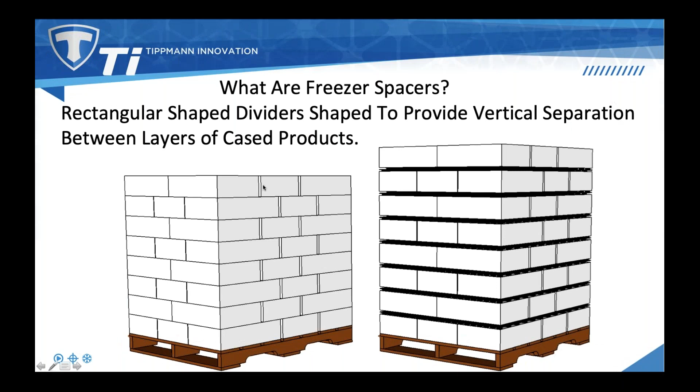So what are the alternatives to freezer spacers? Well, many products have holes in the boxes. I think of hams and turkeys, where if you're able to get sufficient air through the boxes, you don't necessarily need layer dividers. You can also stack the product so that you can get sufficient airflow between the cases to get good freezing results. That's often a very labor-intensive option because most of the time you have to change the ti or the number of cases per layer to provide enough space between the cases, and then you probably have to return those layers back to a full layer to be able to ship the product.

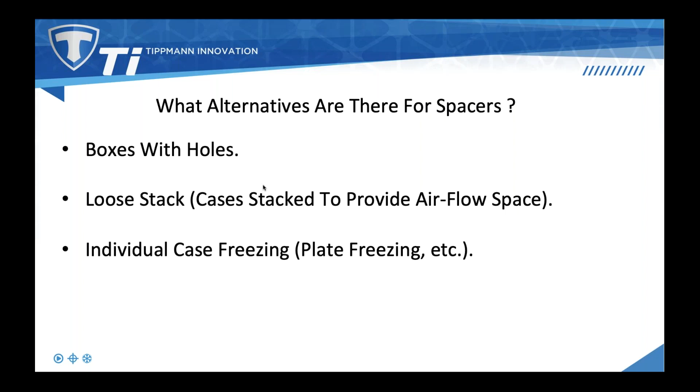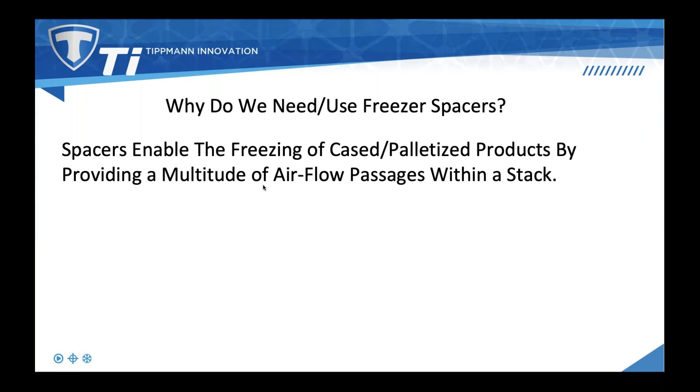And then obviously there's other technologies, either IQF of the product or individual case freezing, plate freezing, VRT, those other solutions. But we're going to be focusing exclusively on case and palletized products that require spacers. So really, why do we need or use the freezer spacers? Again, the spacers enable the freezing of the case palletized products by providing a multitude of airflow passages within the stack. Further down in the presentation, we'll discuss the importance of the number of airflow passages versus the height of the case product.

So what other functions do we need the spacer to do? Number one, the spacer has to be able to support all of the products above them. So if the cases are forming around the spacers and cutting off the air supply, that's a problem. And of course, they have to provide the vertical separation for the airflow we need. So when we look at a pallet, here's a little wireframe pallet. We really want every case in the stack to freeze at the same rate.

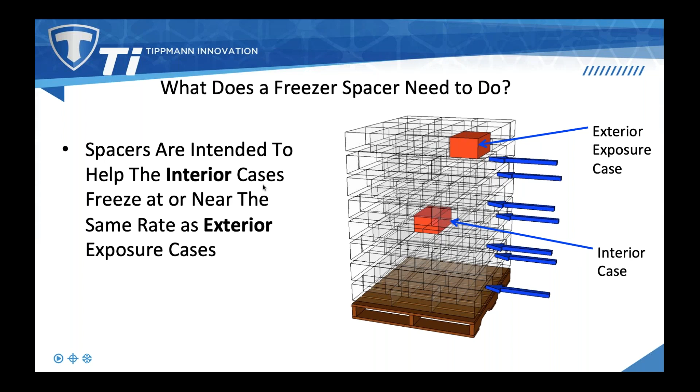So I've just picked out two cases. The first one is upper right. That exterior exposure case, most people have very little problem freezing a case in that position on the pallet. Whereas further down in the pallet, midway and lower, can be challenging if your spacer is not performing well. So again, we need to have it properly support all the cases that are stacked above it, and provide sufficient airflow space to get the heat transfer done. So now, next I'm going to talk about challenges that are faced by all spacers.

So the first thing I want to discuss are case and pallet dimensions. I call it the double whammy of the tall case, where tall cases require longer dwell times because there's further distance to center, and it just takes longer to freeze the taller case. And then the other thing that really hurts us is taller cases allow for fewer spacers. So in a few slides, I'll show you two examples. And then the next thing that we all are challenged with is the accumulated weight causing a crush challenge.

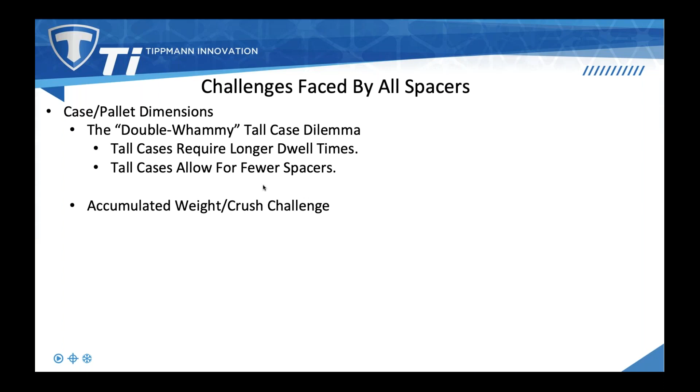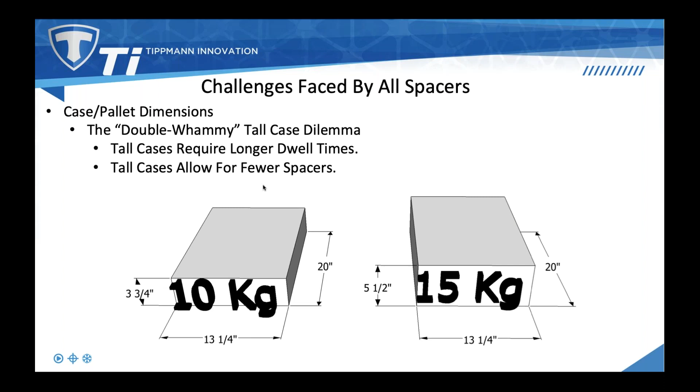So here's two cases. I have a 10 kilogram and 15 kilogram. This happens to be details from a leg quarter project. Notice the 10 kilogram case is 3 3/4 inches tall, while the 15 kilogram case is 5.5 inches tall. And this is a 7-ti box, so the base dimensions are the same, 20 inches by 13 1/4.

So when we put these cases into pallets, we end up with somewhat similar looking stacks, but when we consider what we're faced with, the shorter case on the left, the 10 kilogram case, the weight of the product is just over 2,000 pounds, but we're able to get 13 spacers into that stack. While the pallet on the right, the 15 kilogram box, the taller box only yields a 9-high arrangement, so we have 9 spacers.

So in both of these, we do have a spacer on the bottom. Some people omit those, some people include them. It really depends on testing whether it's needed or not. But now we have 9 airflow passages versus 13, and the distance to center on the taller case hurts us. So that's why I call it the double whammy of the tall case dilemma.

So we have data that shows the performance of these two in about a -15 freezing arrangement. The shorter case with more spacers, they're able to turn in 18 hours with a 0-degree core temp, while the pallet on the right, the taller cases with fewer spacers, that's 1/3 more hours to freeze. So you can tell that the tall case really does have a significant effect. So when we're doing freezing or tempering, clearly we're looking at box height as a very important consideration.

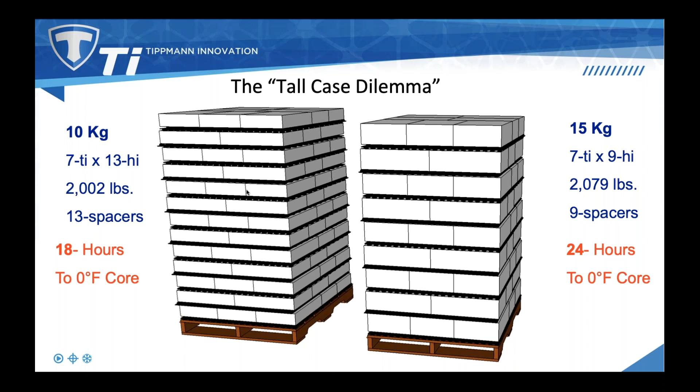The next challenge is something most everyone can go view. If you're doing a considerable amount of freezing or tempering, start watching your pallets. Make sure they're performing like you're wanting them to. And here in this example, I grabbed that 13 spacer pallet just to show that the top spacer is only bearing 154 pounds of product above it. So obviously we're not expecting crushing at that top layer. Then you pick up 154 pounds per layer moving downward. So at the very bottom, between the bottom two layers of product, that spacer is now bearing 1,848 pounds and is very prone to crushing.

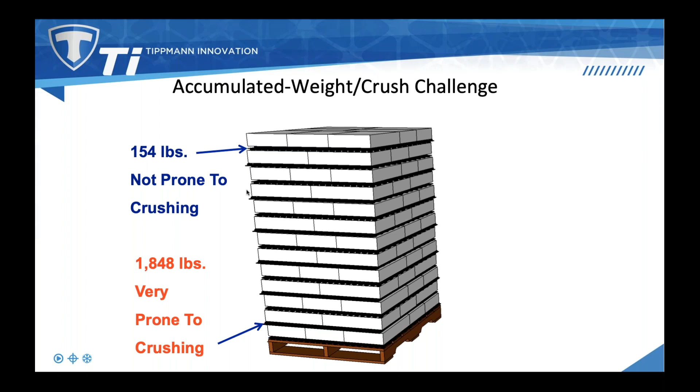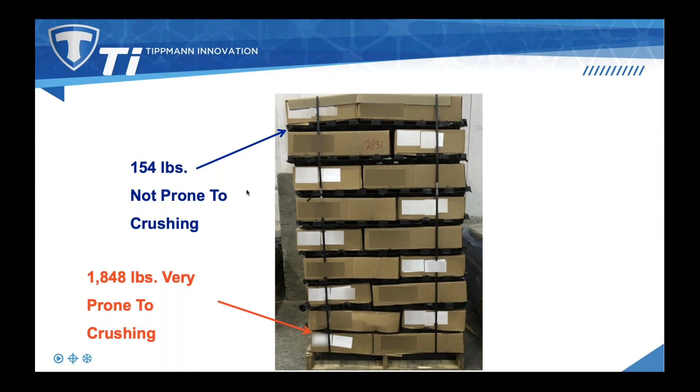So here's a photograph of product, and it shows us what we often will see. For someone that's doing product freezing or tempering, these kind of pallets really become challenging. You can see the significant space near the top of the stack. In fact, on the second layer, I can actually see through the pallet and see the panel wall. So we have great open area. That spacer's doing a great job on the top, about 6 layers. And it looks like the bottom 3 layers, there's significant crushing. And really we see more case failure causing the crushing than spacer failure. We'll discuss this further, but we're going to touch on case carrying area and why that's important for case integrity.

So here's a couple other views of that same pallet. You can see on the photograph on the left how really the bottom 3 layers, there's virtually no visible space for air to be going through that pallet. It's virtually cut off. So if you're trying to get fast and consistent results, and you're faced with this accumulated weight and failure of your corrugated box, you can expect a significant difference in performance in this single pallet. Not to mention how the rest of the pallets in your freezing system are operating. So I think it's fair to say the best way to deliver fast and consistent results is to provide excellent velocity in all layers.

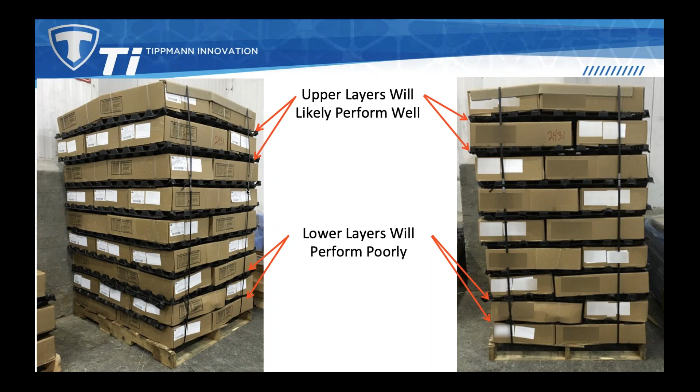I think we can all recognize some of the distinct disadvantages. Obviously, it's somewhere between difficult and impossible to sanitize. So if you have a product that's freezing or tempering product that's purging, where you're getting your spacers wet, exposing them to liquids coming from boxes, this is a challenging solution.

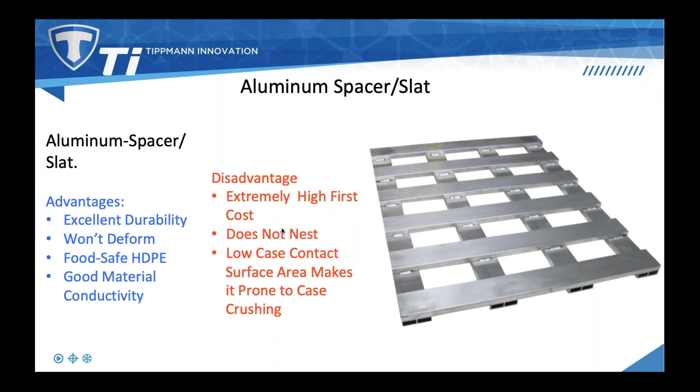On the disadvantage side, these things are very expensive. They're hundreds of dollars first cost. Next thing, obviously, they don't nest when you stack them. They're going to accumulate their actual height. The next thing is the low case contact surface area makes it prone to case crushing. So even though we're not going to crush the spacer, they are going to be prone to case crushing.

The egg crate spacer is probably the spacer most people are most familiar with, and obviously it gets its name from its similarity to an egg tray or egg case. The advantages are low first cost. These things, if you're buying in quantities, you might be buying them for $5 to $6. So they're low first cost.

They are fairly low profile, typically 1.5 inch dividing height. They nest well when you stack them. They are easy to clean, sanitize, and they are food safe, HDPE, high density polyethylene.

The disadvantages: these are notorious for crushing problems. Very poor case carrying support area, and their airflow passages are easily cut off by cases that are crushing. So I'm going to call those poor airflow passages.

The next spacer we're going to look at, I'm going to call the maxi spacer. I think that's a trade name, but there's a host of taller spacers. So this is just a family of taller spacers with a non-egg crate profile. Just the height advantage, I think these are like 2.5 inches tall.

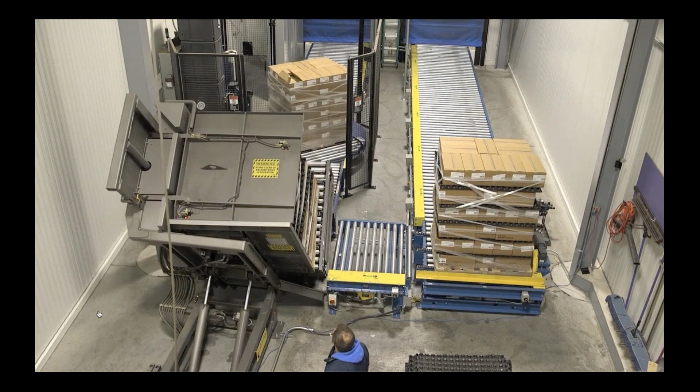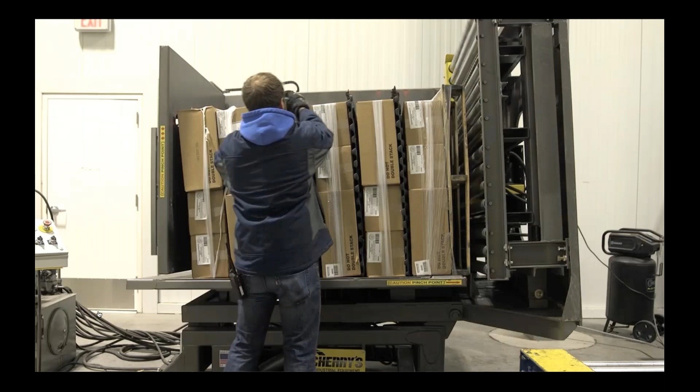So you can see the case is being conveyed onto the tilt table, and the operator is going to tilt that pallet back. You can see he has a pallet up front that's already being wrapped, and it will automatically convey out. But he'll move a couple bands of wrap out of the way to pull the spacers out. There's a stack of spacers behind him, so he'll wrestle these out, stack them on the pallet, and move on.

That really concludes my presentation. Hopefully we've drawn attention to some of the more important considerations and helped explain some of the spacer technology improvements and different ideas people are using. It really comes down to providing excellent velocity between every layer to deliver fast and consistent results to our customers.

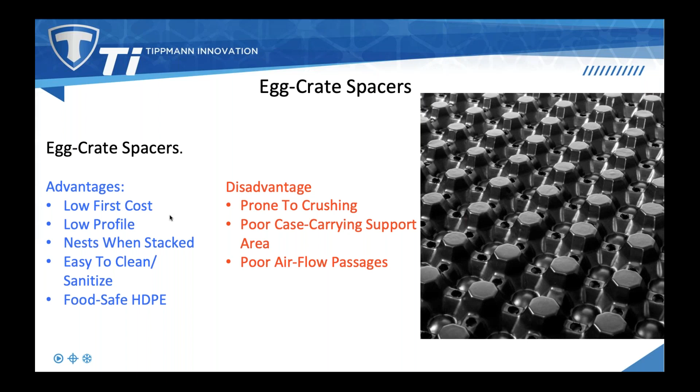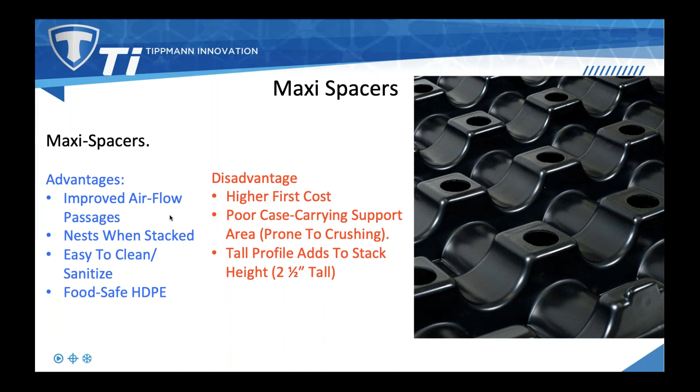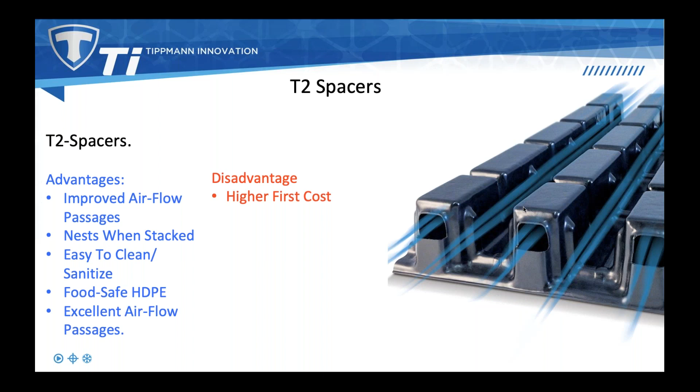All right, case carry area. Let me see if I can scroll upward in the presentation. I'm going to the egg crate spacer photograph on the right of this slide. If you look at the top portions of the egg crate, they're kind of reflective — that's the area that engages the bottom of the case. An egg crate spacer, and really virtually every spacer that allows airflow in two axes, has about a 25% engagement area. So in a 40 by 48 arrangement, you have around 13 square feet of possible engagement area. These are around 3 square feet, so it's about a 25% engagement with this style spacer — very true in this arrangement. The spacers that provide two-axis airflow are kind of sacrificing case carrying area for that airflow. When you look at the T2, it has almost 50%, almost twice the case carrying area. So we're trying to do a better job of carrying the bottom of the corrugated boxes so they don't tend to deform and cut off their own air supply. Does that make sense? Excellent, great.